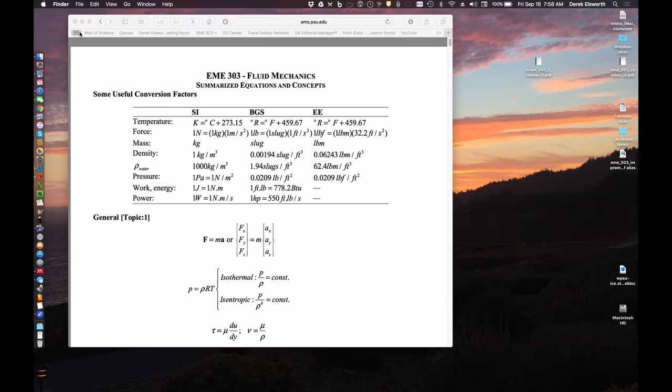And so today what we'll do is we'll go through a review and talk a little bit about the midterm that's coming up on Wednesday. And yeah, that'll basically be our activities for today. And so this will be recorded. The review notes that we'll use are the ones that are online. They're no different from the ones that were used last year. And the recording of what we talk about today will also go online. I've already said in my emails, I'll repeat it. It will be different from last year, but it's the same idea as last year.

So I guess the podium lights are on. See a little different, bright whites. Can people see what's up there? Okay. Are the lights the same as they usually are? Seems like it's darker backwards, but lighter forwards. So, for some reason, if this is set differently, so. I know. That's right, exact opposite. Maybe you can't see that.

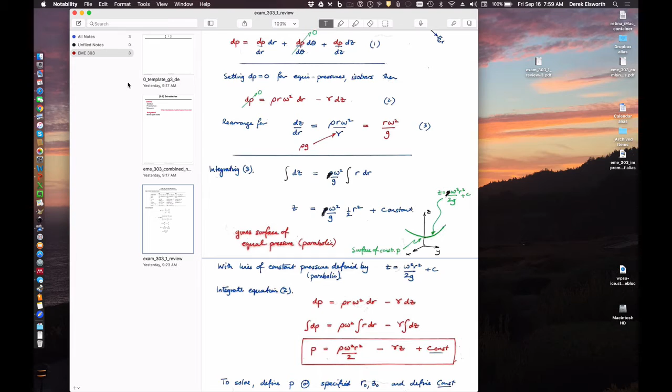So that's the plan for today. We probably don't need this, so you know where to get the material from. We'll use this. All right. So it's not 4.3 today, but you can look at the video online. I think there's an extra credit quiz for it. So because of the particular timing of this, we're a charitable class. So the assignment that you now will be able to do for week 4 will not be due on Thursday, but will be due on Sunday. The extra credit quiz for 4-3, instead of being due Wednesday evening, is Friday evening. So do it before Thursday or Thursday, Friday.

And the midterm's on Wednesday. Also coming up on Wednesday is week 5, by which you should have made contact with your group. There's no penalty for you if you have not made contact with your group for the presentation. But after this Wednesday, week 5, Shengji will send you an email to open it up for your topics for your presentation. That may be the last thing on your mind right now, but first come, first served. We already had one email sent in about what one group wants to do, so it's probably good for Shengji to do that. He'll arrange something on Canvas so you can upload your topic. First come, first served, because we won't duplicate topics. So if 2 groups want one single topic, the second group will have to figure out something else.

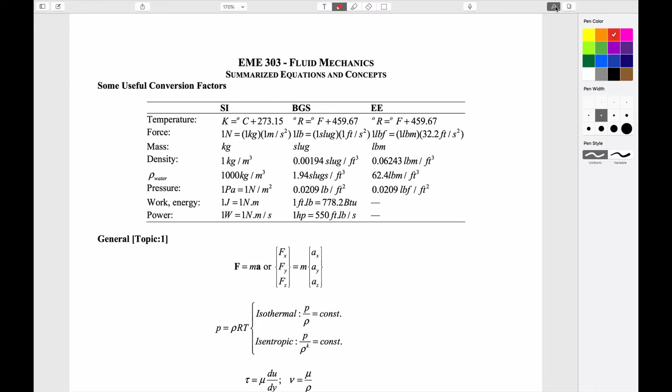Okay. So my hope is for you to show me your best. I mean, that's why I'm telling you this. So it allows you to maybe focus on things, maybe allows you to be less anxious about things. And so that's my motivation for this. And so the review notes are the ones which are here. So I'm happy to answer any questions on that. I won't answer questions on what's not on the test because it seems like there's an intrinsic liability there. But you told me this wasn't there.

But the other thing you can do is, since these things are recorded over the years, you could go back to 2015 and 2014 and 2013 for which you have the exams, and you could check what was said in there, and determine whether I'm spinning you a line or not, if you so wish. So I'm sure you're all very adept at taking exams. You've taken many in your career. You don't need my advice on how to do them. In my view, the third question is actually much more straightforward than it looks, and is perhaps easier than the other two. And so you can weigh out what you attack first. So, okay.

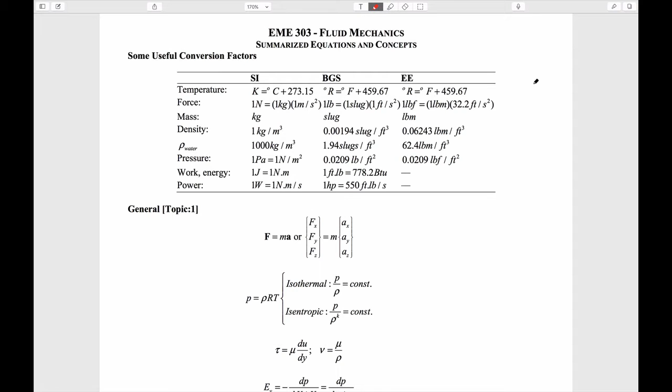All right. So my plan is just to kind of go over what we've done for the first 3 weeks and 1 period, right? It includes 1.1 through to 4.1, which is the material that's on it. That's why the website is laid out that way. And of course, you can go through the material that we've gone through at your leisure online. I haven't looked at the YouTube hits for that to see how many people are doing that, but I guess we could, for instance.

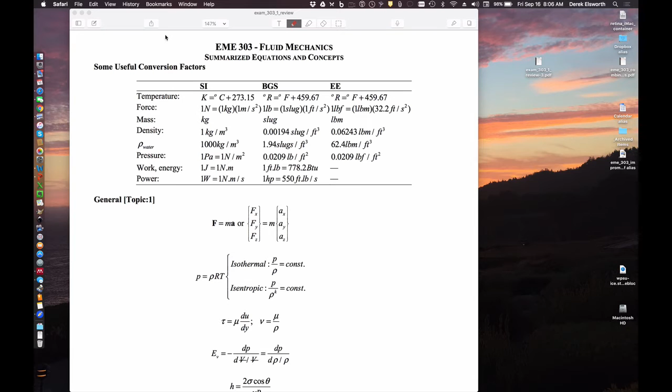Let's just take one that I was definitely here for. So, until the first test. 168 views. Well, we have 310 in the class, so some of you are definitely here for it, and some wouldn't have been, which is perfectly fine, of course. Actually, you can look at the analytics on Google, and you see this big spike before tests, which is fine. That's what they're there for. People use them in whatever way they wish. Right. So my plan is just to go through this. So any questions before we just start rolling?

Yes? Where is the exam? Oh, sorry, yeah. 100 Thomas. It's in the big auditorium in Thomas. I think it's 100. I'll send that out in the email as well. And so some of you who have PNG fluid and rock properties, come at 9 o'clock when you're done. So it's in 100 Thomas. All in one room. Sometimes we're split between rooms.

Protocol: equation sheet, you can have anything on it you want. And we're going to ask you to hand your equation sheet in with your script. So I'm curious to see what people have on there. But come prepared to lose your equation sheet. Calculator, pencil, etc. Closed book. If people ask questions to clarify things, we usually put them up on a Google Doc, which has been shared between multiple rooms when it's been in multiple rooms, so that you get the benefit of other people's questions, and so it's hopefully fair.

Yes? Do we get this equation sheet, or is it just whatever we bring with us? You can make whatever you want. Yeah, okay. There's no warranty involved. This is the stuff in the notes, so you need to make your own. And it can be anything you like, yeah. Front and back, too? Yeah, 2 sides. And on the edges if you wish. All right? Yes?

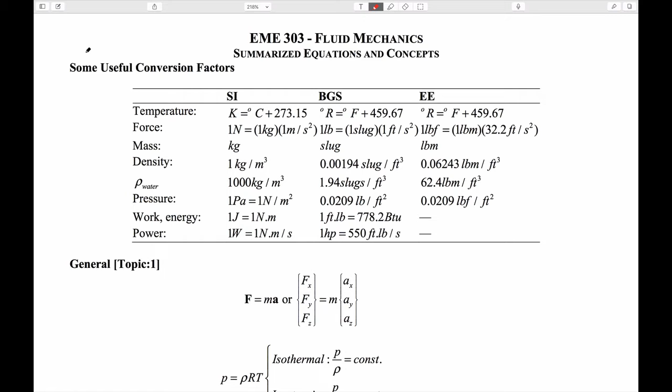All right. Okay. Well, so you can listen to this. Those coming: 3 questions. Accelerations, linear and rotational. Manometry, fluid pressures acting on structures. Fluid pressures acting on structures that can fail. Components, right? So with that in mind, we'll go through what we've been through in the class. This should all be old school to you now.

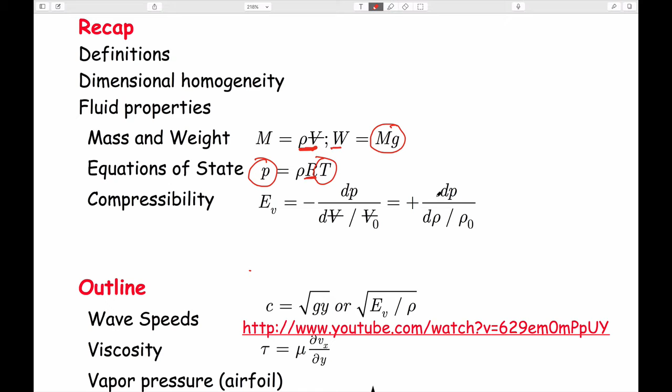You know what the difference between mass and weight is. Oops, I'll make this smaller. You know this is weight, which depends on what planet you're on, and mass, which does not. We know the ideal gas law, absolute pressures, absolute temperatures, a coefficient which relates them. We know what compressibilities are, that depends on changes in pressures with volume or changes in pressures that occur with density. Because if you change volume with the same mass, by definition you change density.

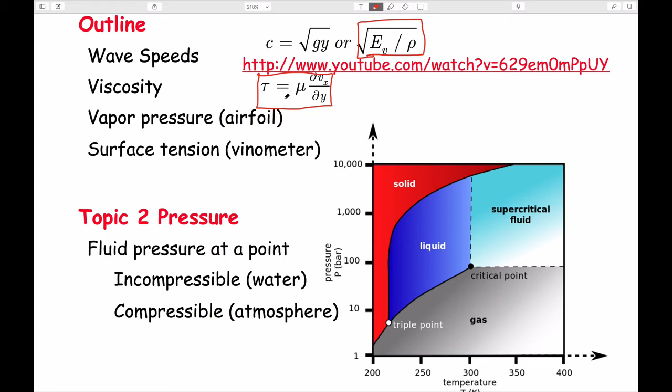We know about wave speeds in confined media, as you're hearing me now, as the modulus divided by density, or the celerity wave, which is just a function of the depth of the fluid and the gravitational acceleration. We know about viscosity, the mechanism by which we lose energy in systems, which conforms to Newton's law of viscosity, which relates a shear stress that you apply to a velocity gradient that gets established, and the coefficient that links those is the coefficient of viscosity. And we talked about both vapor pressure and surface tension. So those are kind of our summary slides.

In terms of materials, well, I guess we've already said it. If you were to need the gas law, make sure that you use absolute temperatures and pressures, because that's important. Make sure you use the appropriate gas constant for the particular gas in question, or if you use the universal one, it's divided through by the molar mass of the material.

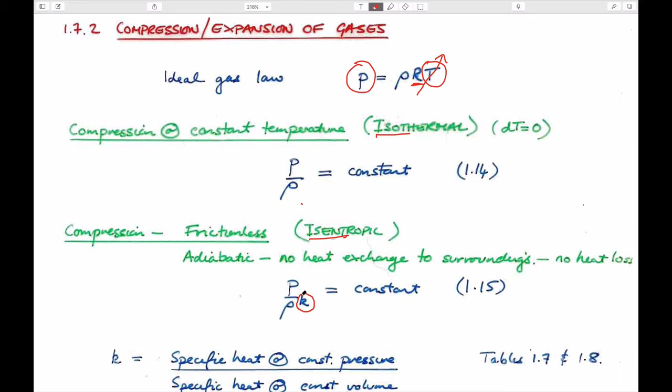It depends on how we change volumes, whether it's isothermal or isentropic. Isothermal means you allow all the temperature that's generated when you compress it to dissipate, so delta T is equal to 0, and if that's equal to 0, then the ratio of pressure to density is always constant. If it's insulated and you keep the entropy in it as you do something to the gas, then you have to account for the ratio of the specific heat capacities at constant pressure and volume, which is a number usually a little bit more than 1.

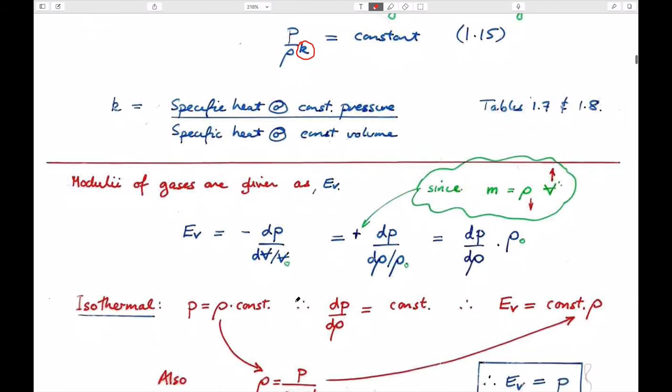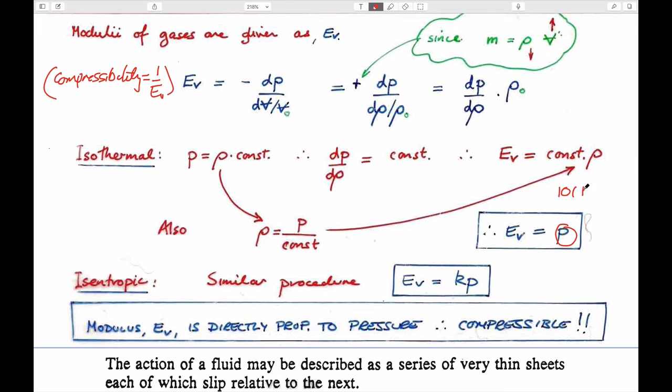We've talked about stiffnesses or compressibilities of materials. So compressibility, as you would use for instance in compressibility of gas in a reservoir, is just 1 over the bulk modulus. We can get the bulk modulus from this expression that we introduced briefly before, but one interesting result is that the modulus of a gas is very, very low, and it's actually equal to the pressure at which that gas is. So we know that the modulus of the gas that surrounds us, mainly nitrogen, is equal to 101 kPa, which is atmospheric pressure in this room, but not on the top of Everest.

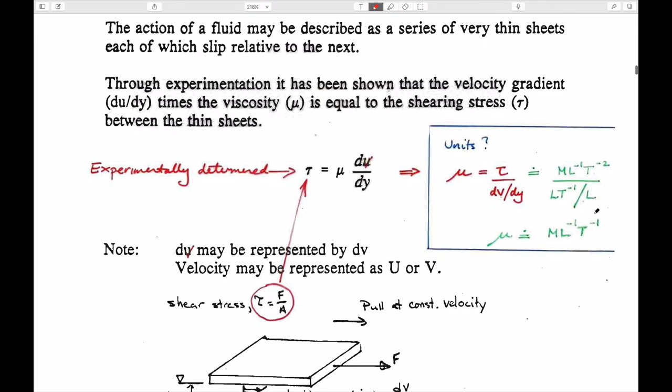Okay. We talked about Newton's law of viscosity. Viscosity is just a coefficient that links together some stress that gets applied, where that stress is equal to some force divided by the area over which it is applied. And we relate that to a velocity gradient. And the velocity gradient comes because we have these stuck conditions, that the fluid is stuck at 0 velocity on this bottom plate and is attached at some finite velocity on the top plate. And so the velocity gradient is just the change in velocity over the distance over which it occurs. So if V is the top one here, and this is 0, then delta V is just V. And so this is this expression here.

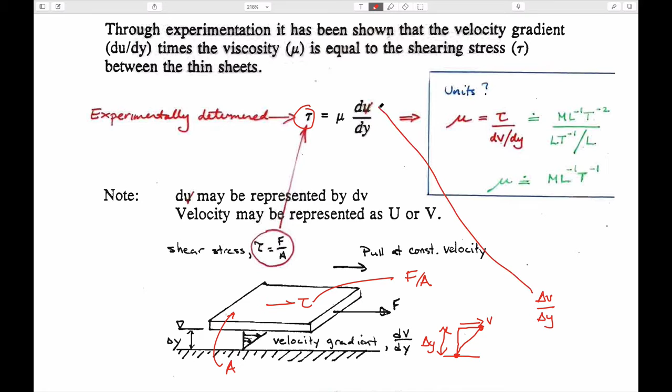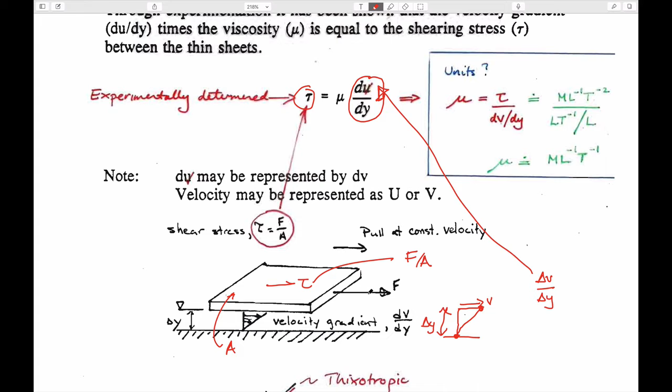And so if we know what this assumed velocity gradient is, how it changes over a small length, and we know what the applied stress is, we could calculate the viscosity. If we knew what the viscosity was, and we knew either one of these terms, we could calculate how much force you have to apply to do it, or what the velocity would be of this plate if it was moving in this fluid. And so that's how we've used that, and you've used that in examples.

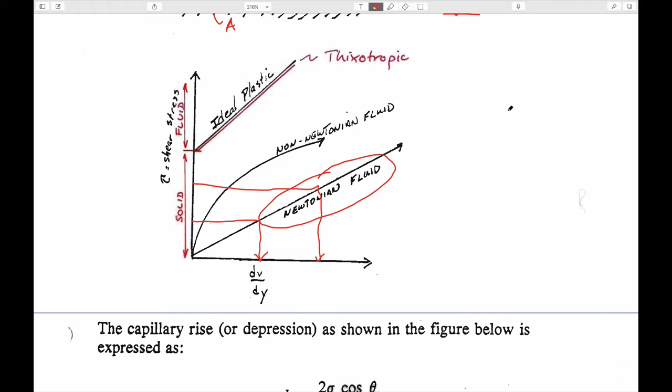We deal only with Newtonian fluids, just because this is an introductory course, but real fluids are sometimes nonlinear. If you double the stress that you apply, you double the velocity. That's all that a Newtonian fluid says. And so we deal only with Newtonian fluids, not drilling muds, which would be thought of as Bingham fluids, or thixotropic or ideal plastic fluids. Okay.

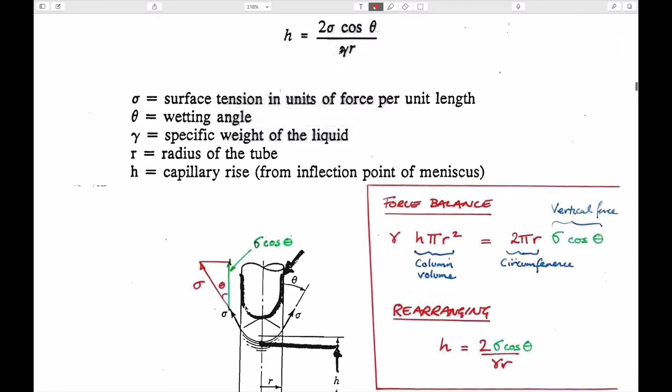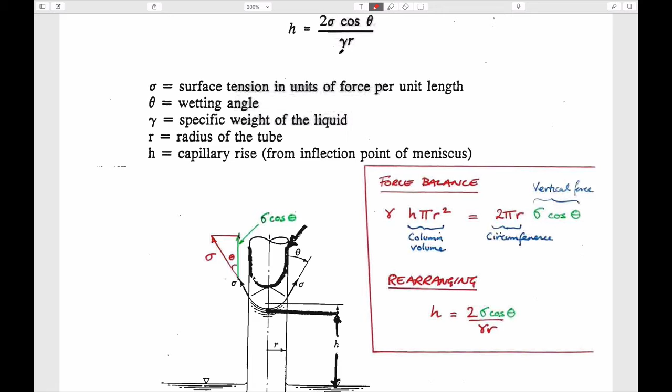We've talked about capillary rise or interfacial tension. This is one particular exposition of that, in that it looks at how high fluid would rise in a capillary. It follows along with force balance that we've used in other things as well. And it draws on a couple of observations which we've only dealt with a bit more belatedly, and that is that we can cut this thing off at the bottom.

We can cut this thing off the bottom because we know that if we go to any two connected points that you can get from one to the other that are on the same elevation, by definition the fluid pressures have to be the same. If the fluid pressures happen to be the same, then we can cut this off at the base. And we know that the fluid pressure acting up here is just atmospheric pressure, which is also the same as the fluid pressure acting down here. And so we can just ignore them if we take fluid pressure to be gauge pressure, which is 0. Can't always do that. Note that point.

But in the case where we're looking here, the fluid pressures cancel out because we're taking atmospheric as 0, and we're doing everything else in gauge pressures. And so the solution for this is just to cut this off and draw a free body diagram that has this weight of this fluid hanging downwards, has a force T, which is on the circumference of this, pulling upwards or at some angle, and doing the balance. And if you do the balance with an angle, you get this. And if theta is equal to 0, then this is just 1. And so that's a standard result, but you know how to derive that.

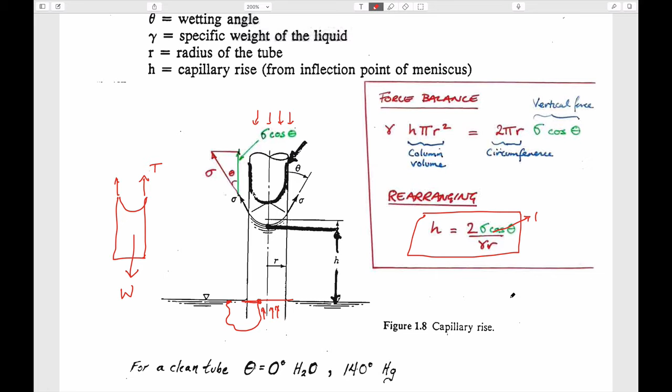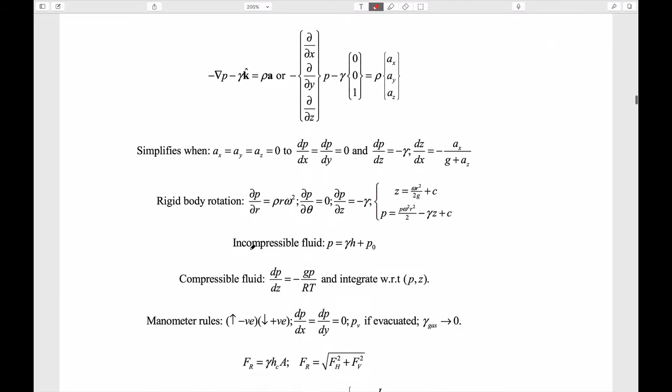I think you know how to derive that because one of your questions in your assignments was, well, calculate the fluid pressure in a bubble. And the only difference is you have to take the surface tension on the inside of the bubble and the outside of the bubble. But you've done that. Okay? So that's in first week.

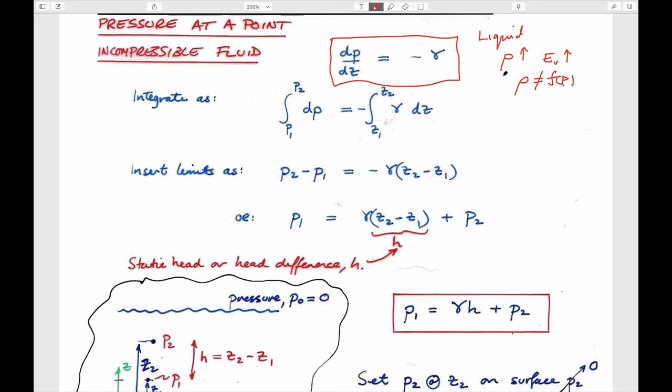We talked then about fluid pressures in fluids and how they vary, either in liquids or in gases. We made the point that this is always absolutely true, locally, at a point. If the fluid happens to be a liquid, the density is large and the modulus is large. And so the consequence of a modulus being large is that density doesn't change very much with pressure. So density is not a function of pressure. Then we can take the density as constant. If we take the density as constant, then we can usually always use this expression here.

And this is just a corollary of that, you know, of fluid pressure with depth. We've drawn this many times. This is dz and this is dp. And by definition, because of this expression, dp over dz is the same as gamma, the unit weight. And this is always true in a liquid. We did an example where we allowed the density to change as you go 6 kilometers down in the ocean, and we saw that it changes by 2%. It doesn't change very much.

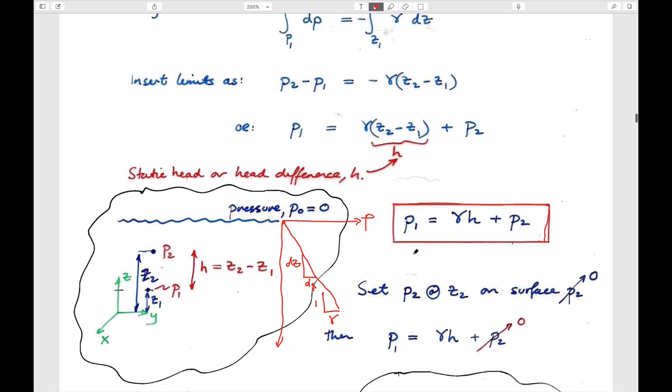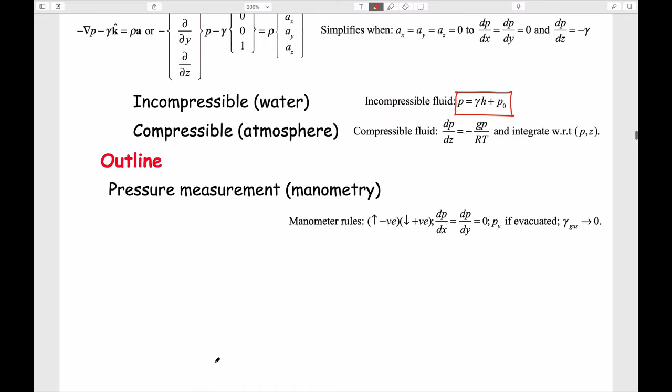And so we can always get that in a liquid. And you certainly know how to do that. You've done many, many examples with that. So you know that this is true. If we work with a gas, then as we mentioned before, this is still absolutely true.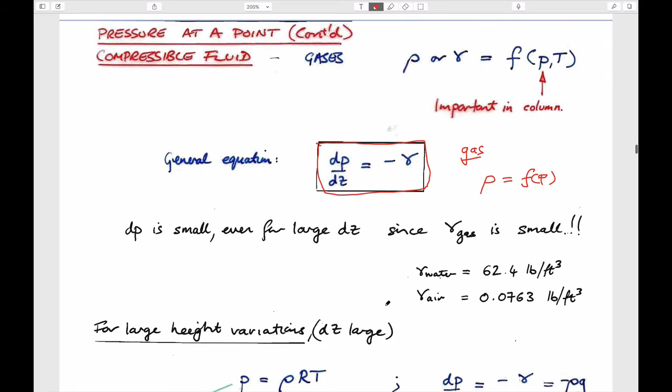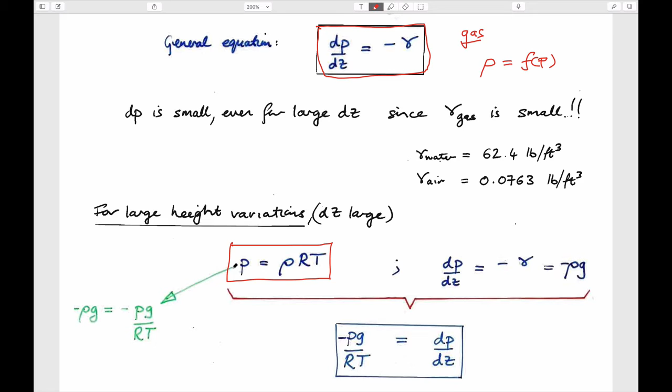But now with the gas, density is a function of pressure, and it conforms to this. You're not going to have to derive this kind of equation. You can see from the other texts if you looked at them, hopefully. But we get a standard result, and the standard result tells us that the pressure varies like this.

It's worthwhile drawing it again. So we've often drawn pressure. Say this is the surface of a lake. We know that in our coordinate system, z is vertically upwards. If we look at fluid pressures, then this would be P atmospheric, which is on the surface of the sea, what we've experienced now. This, like before, is 1 over unit weight. This is positive z in our coordinate system. This is negative z.

And the distinction is that as we go up above here, this is not linear anymore. Still at any point, however, this will always be 1 unit height, and this will always be unit weight of air, and this would be the unit weight of water. They're different from each other, and we've talked about this. And so this demarcation, this line here, would just be atmospheric pressure.

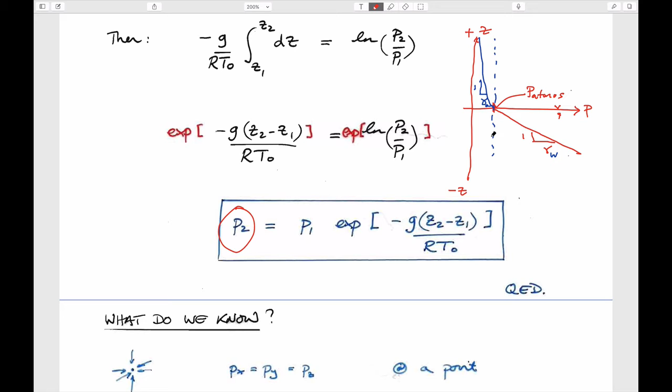And so we usually take the gas within the manometer traditionally to have zero density. So from the interface of a liquid to any place above that in a gas, it's the same pressure. We've done that. The other laws that we haven't proved, but we've hopefully taken on trust, is that the pressures at a point act in all directions with the same magnitude.

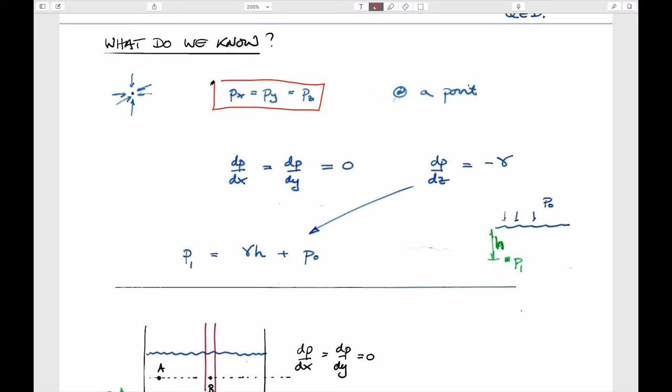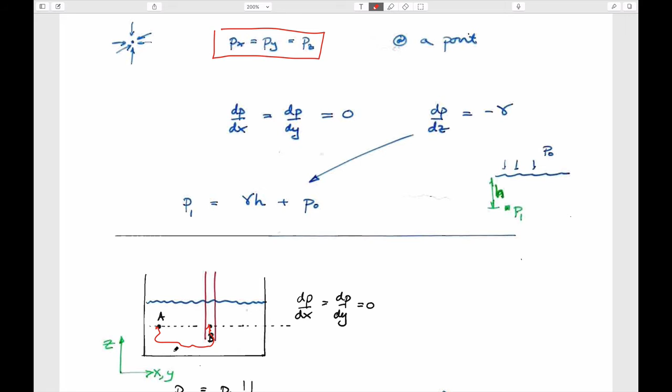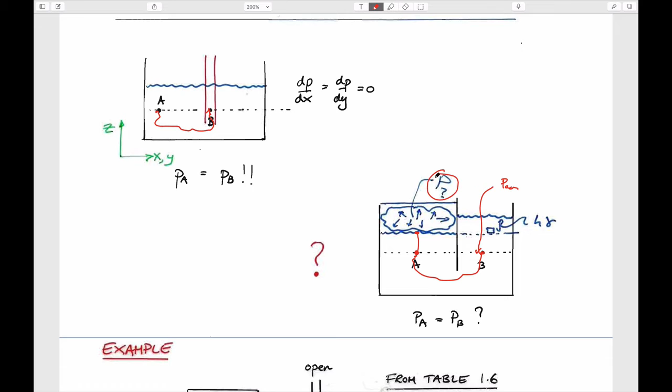And the point that we've already made is that if you can get from A to B without going through a solid surface, then if they're on the same elevation, they have to be at the same pressure. So if you had an example with a cap on the top and some unknown fluid pressure here, you would know that atmospheric pressure acts here, and you could always work your way from atmospheric to this point, then to this point, and figure out what this pressure is. And that's basically the principle of manometry that we use.

Okay. Manometry, again, is just exactly that routine. And the rules of manometry, we have maybe 4 of them. If you go up in a fluid, you subtract pressures. If you go down in the fluid, pressure increases, so you add. So that's the first. If it's in a gas, we set the density basically equal to 0, and the result of that is that as you climb up and down a gas, you take it as constant pressure.

And if a gas is at vapor pressure, then you take it as that pressure. If a gas has been in an evacuated place, like in a barometer, then it has to be the minimum pressure in a gas. P gas min is vapor pressure. I don't think you need that.

But I think the easiest way to do these is to go from a place where you know the pressure, maybe in the opposite direction from this. Here we started at A. So pressure A minus 10 meters times this unit weight. Same pressure across here. Plus 5 plus 5 plus 2. That gets us here. We can go across to this point here. And then minus 2 minus 5, which is 7, with mercury, gives you this atmospheric pressure.

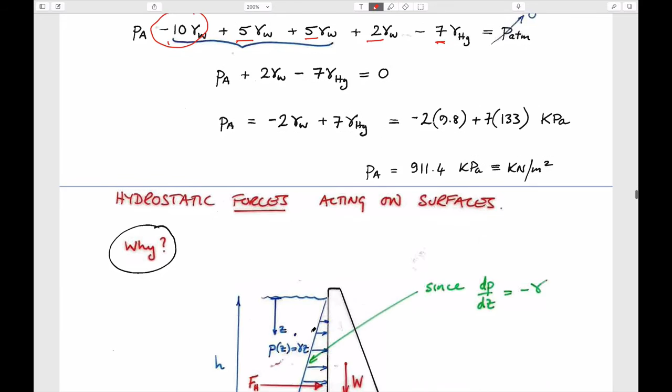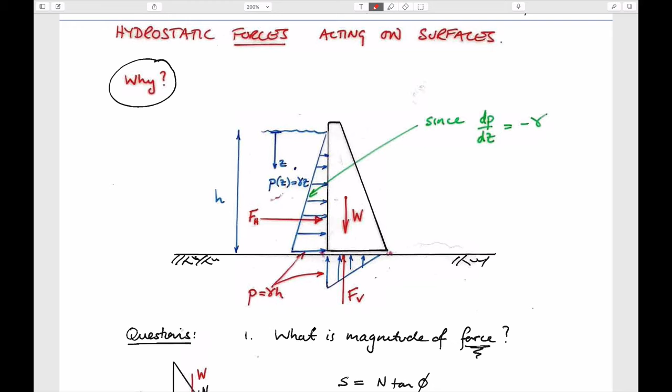So manometry. So you move up and down within the fluid. So you just need those rules. If you go up, you subtract. If you go down, you add. If you go horizontally within the fluid, it has to be the same pressure at those elevations. If you go up in a gas, then you don't bother about the unit weight. So those are the manometer rules.

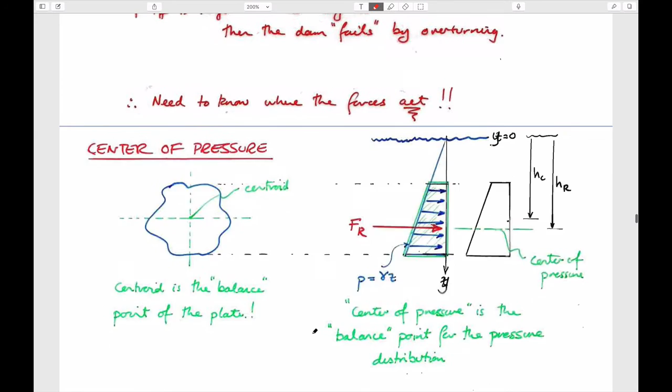Pressures on structures. What do I want to do, this or not? Maybe. I'll make a point. The point isn't very well made in these figures, I don't think.

That manometer problem, how can you assume that the atmospheric pressure is zero? Well, yeah, so if you assume that this pressure here is gauge pressure equal to 0, then all the pressures that you'd calculate would be relative to gauge pressure. If you assumed that the pressure was an absolute pressure, which is equal to 101 kPa, then the value of PA you'd get would be absolute pressure.

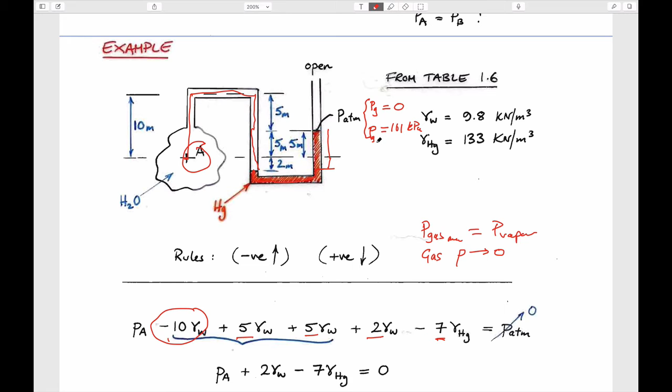That's all. So that's an important question, actually, for the manometer question that you end up doing. For instance, if you're working with resultants. Yeah, so remember that. Remember atmospheric and gauge pressures. Keep that in your mind.

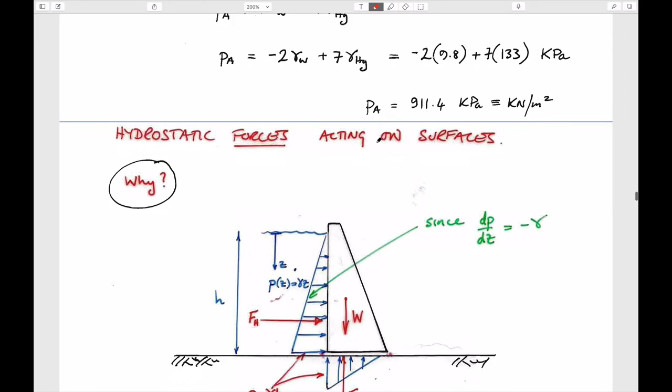So hydrostatic forces acting on surfaces. I guess there are three things to remember, and I'm going to write them down here. One is we can calculate the resultant. And the resultant force, I think, is always given by an area, a unit weight, and the depth of the centroid.

We can now calculate the location where it acts, and we've often called that y sub r. And y sub r is equal to, if I can remember right, I sub c over yc times area, plus yc. And we can always get this by taking moments about any point we want, absolutely any, because we're just looking for rotational equilibrium, moments anywhere.

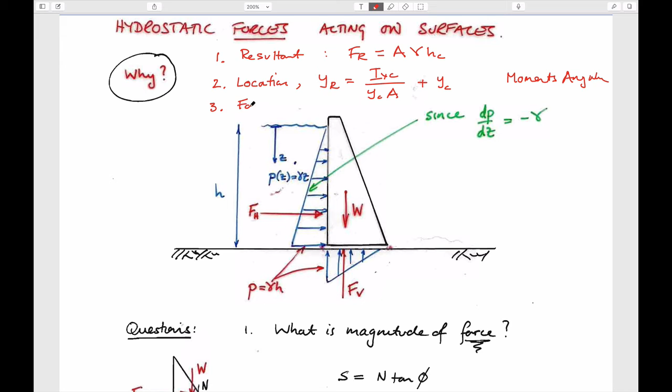And the third is that if we want to look at failure, we need to take moments about the failure point, if you like. Failure mode. So to get the forces that act on the structures and where they act, as in number 2, you can take moments, always, about any point that you want.

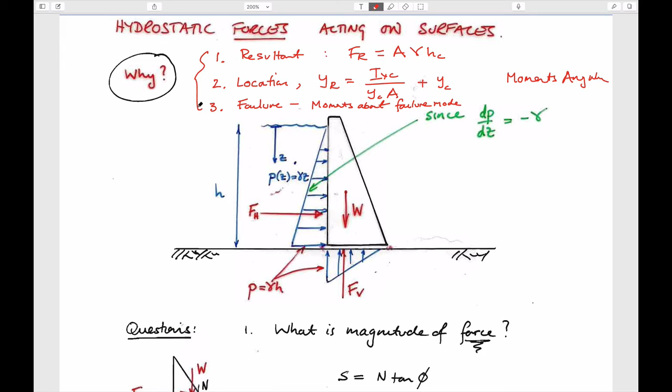But if you want to figure out whether a gate is going to open with a particular hydrostatic force or resultant acting on it, you have to take moments about the hinge point of that gate. Otherwise it won't tell you whether it will open. So I think that's maybe a subtle point, but it's maybe an important one. So I think these are 3 important rules for the third question, which is, as I said already, a failure question. This is too complicated.

Fluid pressures act always at the center of pressure, but their magnitudes are always given by the resultant, which we've already written, which is the area of the plate times the unit weight of the fluid multiplied by the depth of the centroid. The centroid of the surface on which it acts. It's a depth, and so it's a vertical component. So the depth of the centroid is always a vertical depth from the surface to that point.

If the plate doesn't intersect the surface, then the area of the plate is going to be only the area that you see in section here. The location of the centroid is going to be in the centroid of that plate, and it would be exactly at this point here.

Always a depth. And I say that because the location of the resultant is always this value, which we've called y, which is in the plane of this inclined plate. Not the vertical distance from the surface, but the inclined length. And so the magnitude of the force is always given by this expression, always.

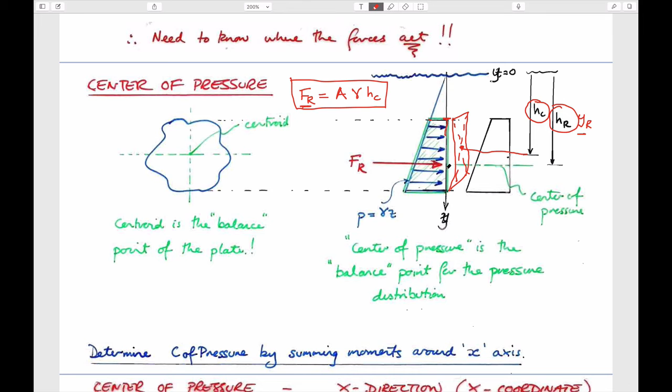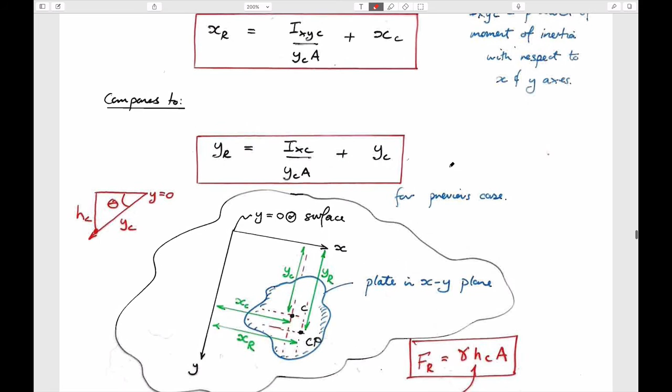But the location where it acts is always given by what we've called y sub r, which is shown as hr here. Happens to be a height here, but it would also be a y direction. And y in this case is always in the plane on which it acts. So that's an important consideration. Oops, didn't mean to do that. And I don't know whether this diagram figures it. You don't need to know this.

But if the plate is inclined, as this is trying to show, then you can always get the location of it, the slope distance from the surface. It's always about the surface. This has to be the water surface here. And it's always this second moment of area about the x-axis. So it's taken about this axis here. That's what this means. It's the second moment of area of the centroid relative to the x-axis.

If you need these equations, you'll be given them. It's something like this, I believe. Check if it's right. I'm pretty sure that's right. But for a structure, this of course is a centroid in the middle of it. And so if it's inclined, then both the y coordinate of the centroid and the y coordinate of where the pressure acts are both in the plane of the plate, the inclined plate. And so you have to remember that.

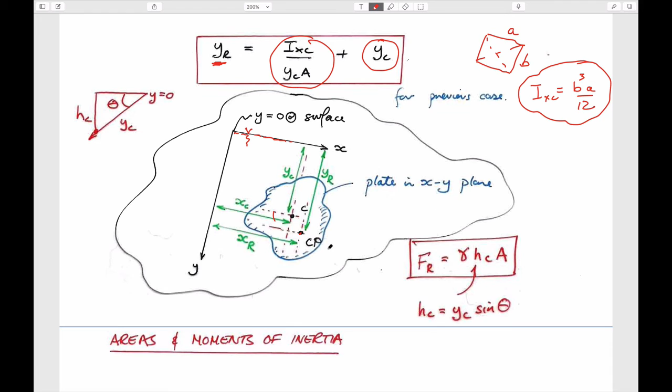So this really is y. If the plate's vertical, obviously it's the same as depth. But if it's not, then it isn't. And what this says is that the center where the pressure acts, the center of pressure, is always at the centroid plus a small amount. It could be at the centroid if this is 0, but it always has to be below it. And so if you calculate a depth where it's acting and it's above it, then that probably isn't right. Okay?

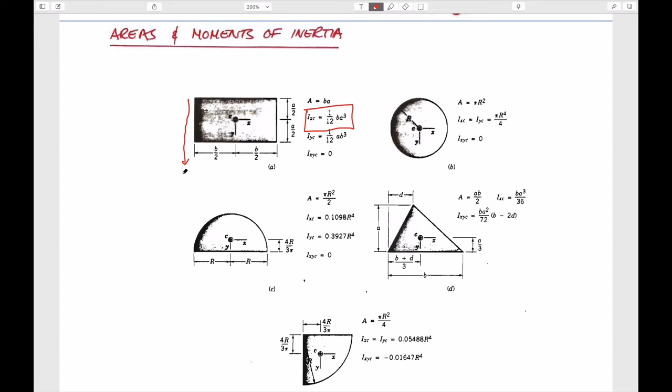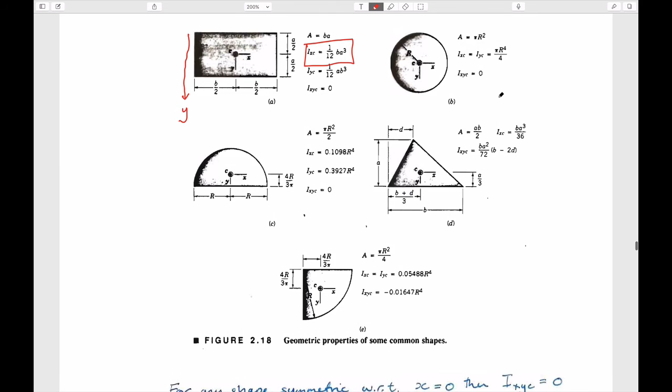Calculate the resultant force, it's a depth. Calculate where it acts, it's in the plane of the thing. This is it here. This is what we just wrote. I guess the A's and B's are switched in what I just drew. This always has to be the depth downwards. This is the y direction. And so all I did was I switched these, I think, right? So if you need these, you'll be given them. You might want to put them on your sheet and understand what they are, but if you need them, you'll be given them.

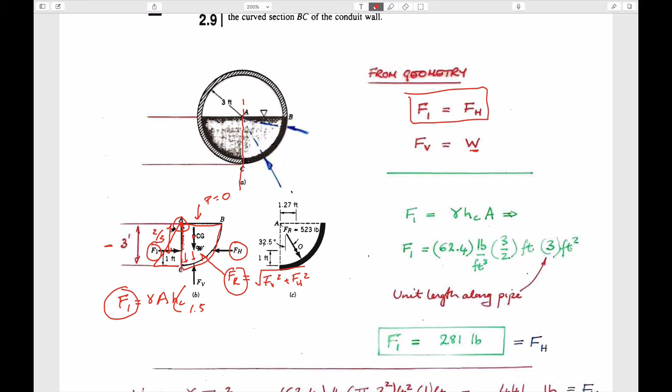And you'd find out that actually, because all the fluid pressures act against this surface, it physically has to act through this point here. The point we made about a tainter gate being able to be flimsy because of that. You can do exactly the same for the case where you have a supernatant fluid on it.

Again, this is exactly the same problem as before, and it differs only in the fact that we have a vertical force acting downwards here. And so all that would be, you could think of it in a couple of different ways. You could think of this as a pressure distribution, which is equal to unit weight times the depth, HA. And so then the resultant force, F1, is going to be equal to the pressure times the area of that

plate. Or you could also think about this as being equal to the unit weight times the area of the plate times H sub C. The centroid of this plate here is going to be this, and therefore HA is HC. So you can do it a couple of different ways. And so the only difference between this one and the previous example is that now we have a new force which comes into this.

If you want to calculate what the resultant is, you could definitely get the resultant by just taking the sums FH squared plus FV squared, just as before. But now the vertical component just has an extra part due to this extra surcharge on it. If you know the magnitude of this, you can also take moments about any point. The easiest place to take moments about would be this, and you'd find out that the lever arm for FR would be 0. Actually, it wouldn't be 0 in this case. It would act differently through that.

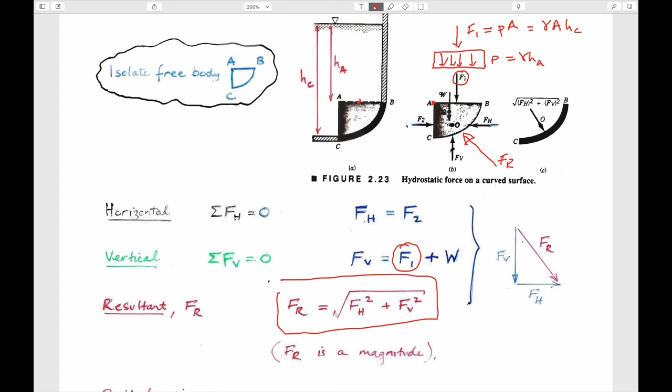So you could take moment arms for F2, W, and F1 relative to FR, and you could find the moment of action. And you could use trigonometry to figure out from the relative lengths of these exactly the direction of action. Okay. Spending too much time doing this. We did this in class, so I won't go through it.

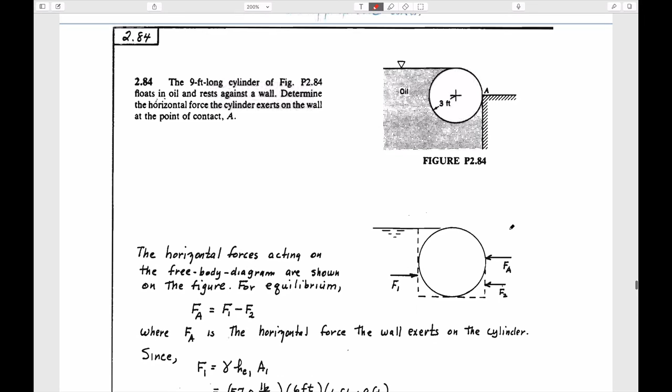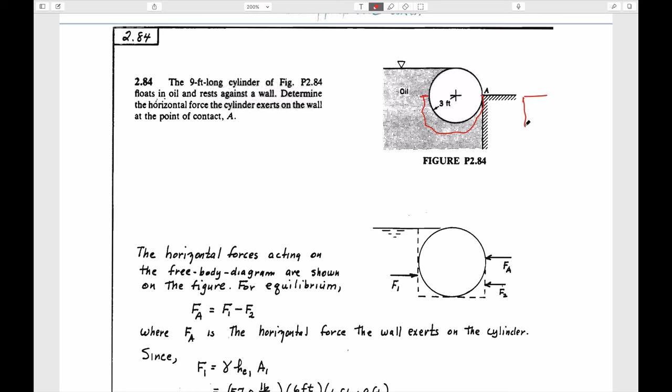The key is to realize that this point here is at the same elevation as this point here, and therefore has to have the same pressure, and therefore the pressure distribution on this part of the cylinder has to look like this. If you take a free body. I hope I'm not confusing people, but there are 3 ways we can do forces on structures, and we've talked about each of them in class.

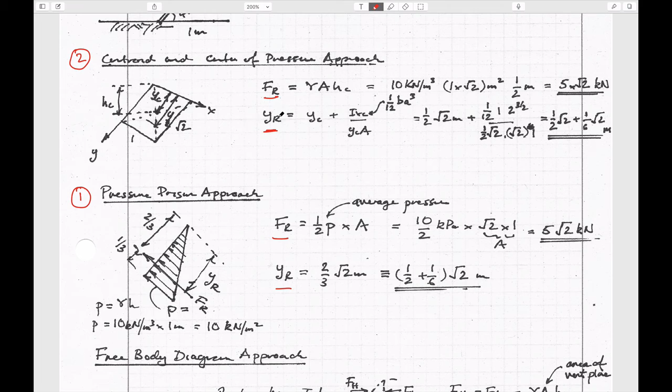So if you look at this example, it's just a gate with fluid behind it. We could calculate the resultant force on this in 3 different ways. We could do it by just taking pressure triangles, which is the easiest one, and looking at the magnitude of the resultant force and its location being 2/3 down it, and we get the result for both FR and YR. We could do it by taking, again, the same equation for the resultant force, but using the first moment formula to calculate where it acts on an inclined plane, which is the second way we talked about.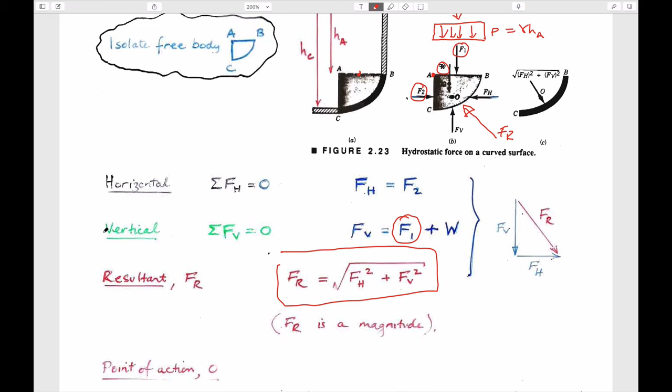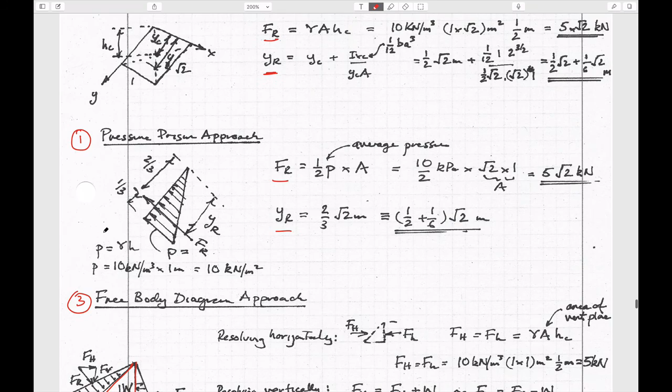Or we could do it using a free body diagram to take the area underneath the gate and to resolve everything like we just did in this particular case here. They should all give exactly the same results. And this one page hopefully demonstrates to you exactly that they give the same result. And so if you're unclear about what's going on, then at least look through here and verify for yourself that you get exactly the same results for this. Well, it becomes a complicated example, but it's a relatively straightforward example.

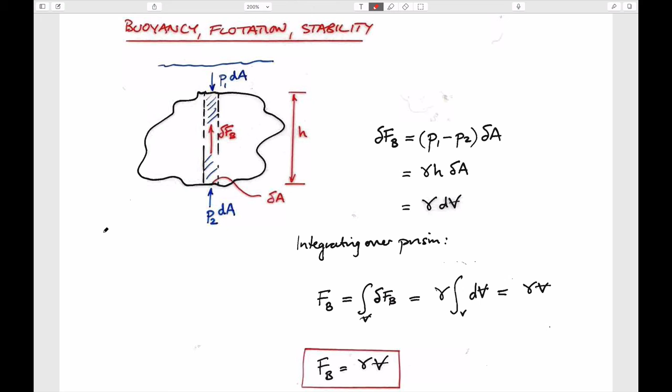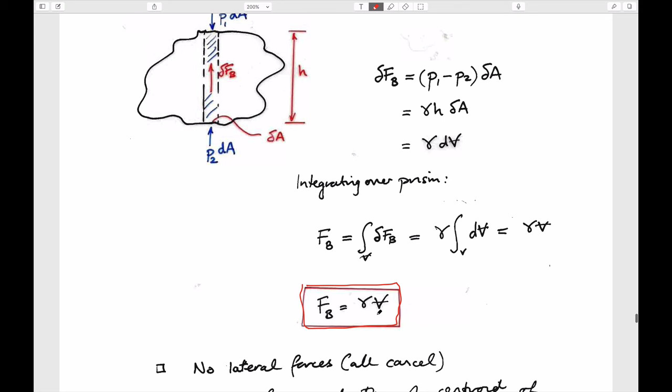The second question has a buoyancy, a trivial buoyancy question in it, which I didn't mention. Buoyant forces are equal to the weight of fluid displaced. And so we talked about concepts of calculating what the buoyant force is. It's just equal to the volume of fluid that's displaced multiplied by the unit weight of the fluid that is displaced. Again, it all relies on free body diagrams.

We can do a free body diagram for this being pulled down by some tension. There's a buoyant force which is equal to the volume of this multiplied by the unit weight of fluid displaced, and maybe it has a weight as well. And so if we resolve these, if we know what the buoyant force is and we know what the weight of the thing is, then we can calculate the tension.

If we know what the force is, for instance the tension, which is out of balance, and we let go, then we can calculate an acceleration from that if we wanted to. And you'll see in other questions we've done that. The first one is about both linear and rotational acceleration. So a couple of results.

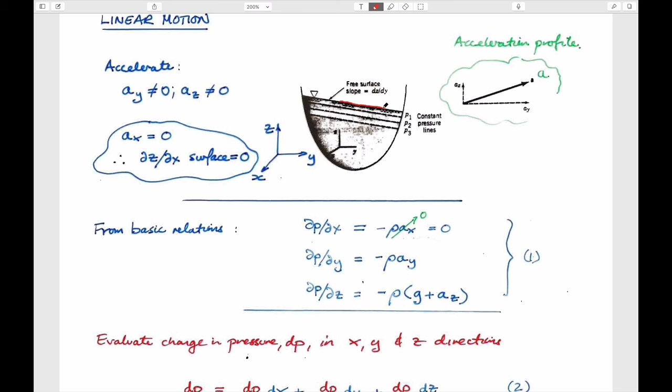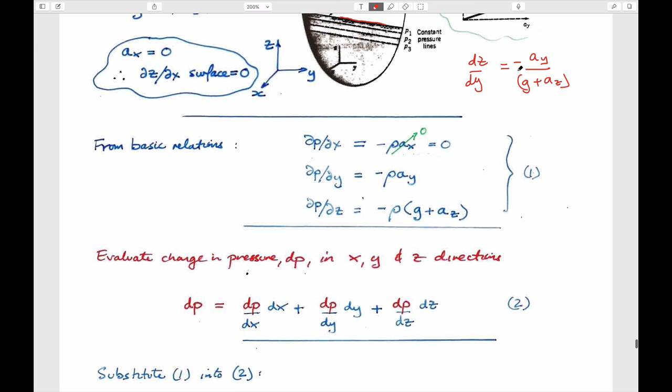One is that if we accelerate a fluid linearly, we know that it will slop up against the back of a glass. We can calculate the slope of that surface, and it will be given by this equation at the bottom, which you wouldn't have to derive, but let's just write it up here. dz/dy is equal to minus ay over g plus az. And that says a couple of different things.

It says that the slope of this, if you accelerate it horizontally, is governed by this expression. If there's no net upwards acceleration, az, then this would be 0, and the gradient would just be the ratio of those two terms, ay over gravity. If there is a vertical component, then the slope would change slightly, and you can calculate that. That's a standard result that you can use, and you can look at what we talked about in class.

If you look at the pressure distribution in this, then the pressure distribution is always given by pressure acting in all directions is equal to the depth, which I'll call h, multiplied by g... yes, it's a plus. This term says that if there's no vertical acceleration, it's just your normal triangular distribution, and you can now calculate how pressure changes with depth.

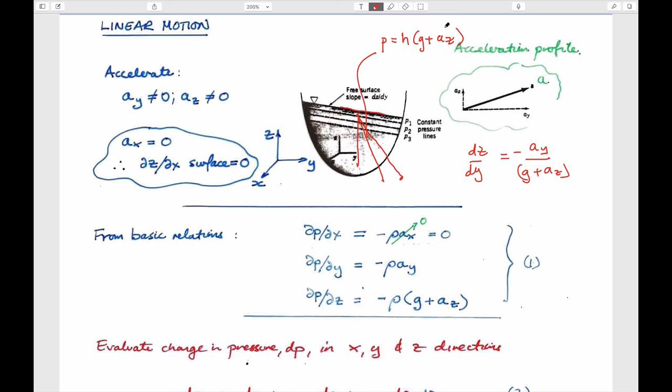If it's accelerating upwards, just like feeling your legs in an elevator, the pressure force in your legs as you accelerate upwards is larger. And so you'd expect this pressure distribution in this fluid everywhere from the free surface to be increasing like this. If it's doing the opposite, it'll be less. And so this is a key result.

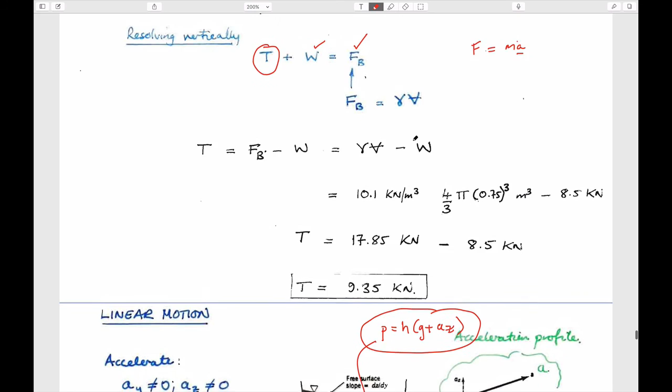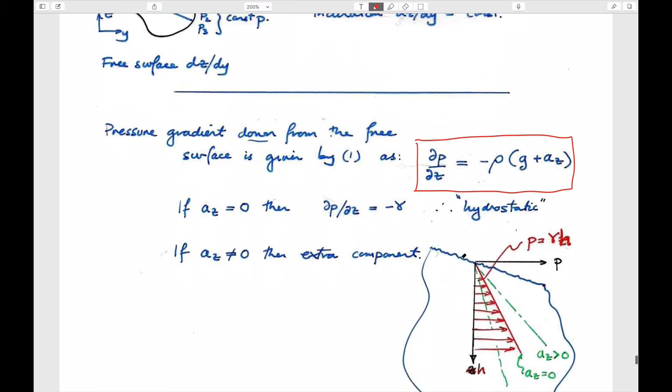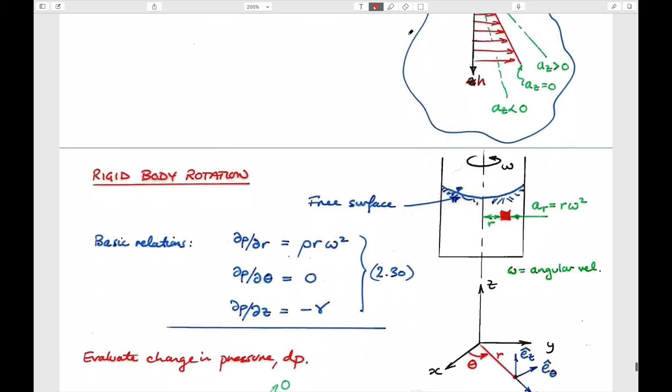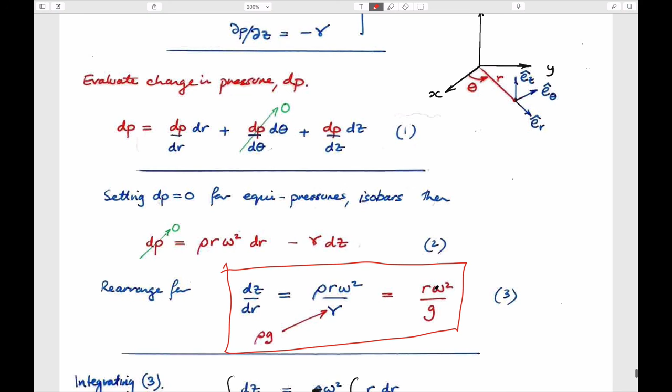And finally, rotational accelerations. It's going at constant velocity, but we can calculate, for instance, what this free surface looks like from this. The slope of the free surface will be this. And so if we know at what radius we are, we know what the gravitational acceleration on the planet is, and we know what this is in radians per second. And what do we have? V theta is equal to R omega, I think.

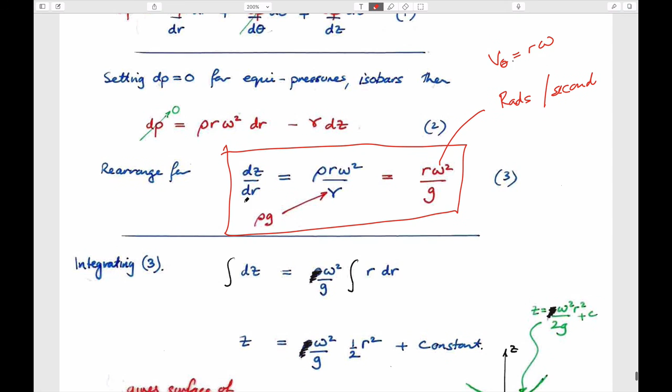Then we can calculate what this gradient is. If we wanted to integrate this expression, then we get one of our standard results, which is how z changes as we go outwardly from a location. It has a constant in it, so it makes it a bit more complicated for us because we have to anchor it to a particular value.

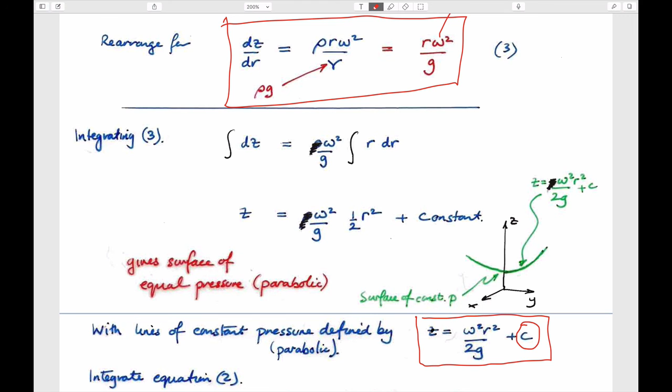But nonetheless, if we can evaluate what z is at a known place, at a known radius and a known rotational speed, then we can calculate what c is, and then we can use that to calculate what z is at some other location at a different radius. And we did an example in class for that.

And if you look at the fluid pressures within a fluid, if you look at this surface that's being twisted around this center line, then if you looked at the pressure distribution that you had from this going downwards, if this is H rather than Z,

then the pressure would be equal to what we just said before, which is unit weight, density times gravity plus acceleration in the z direction, multiplied by whatever the depth is. So in other words, if this thing is spinning around and it's just sitting here on this planet, there is no extra acceleration upwards, and so it's just the unit weight with depth that we see.

If it is getting accelerated, if it's going up in an elevator for some bizarre reason, then there's a vertical acceleration that we'd have to deal with. And it adds to gravity going upwards, and it subtracts from gravity going down. I think that's it.